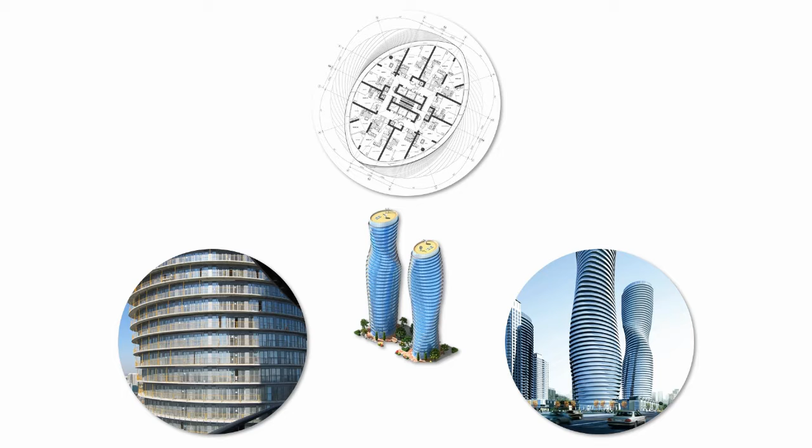Let's begin our main contents with a short video. I remember one day we got an email, but when I opened it, I saw congratulations.

Mississauga has ambition to build a future. So I think the question is, what does the future city look like? In the high-density urban context, we should introduce nature.

I was quite sure our tower shouldn't be another memorial or symbol of strength or power. We should introduce this beautiful curve, the softness. The opportunity was rare, not only for me, but also for a city like Mississauga.

Yansong Ma is both founder and chief architect of MAD Studio. He designs naturalistic architectures to create harmony between the environment and architecture.

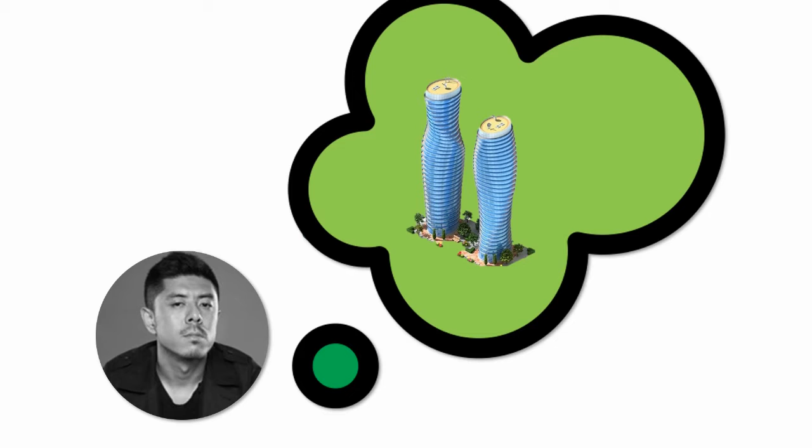After much thinking, Yansong Ma designed the Absolute World Tower. Its design reflects Yansong Ma's design spirit. The building contains three characteristics opposite to common skyscrapers: naturalism, delicacy, and humanity.

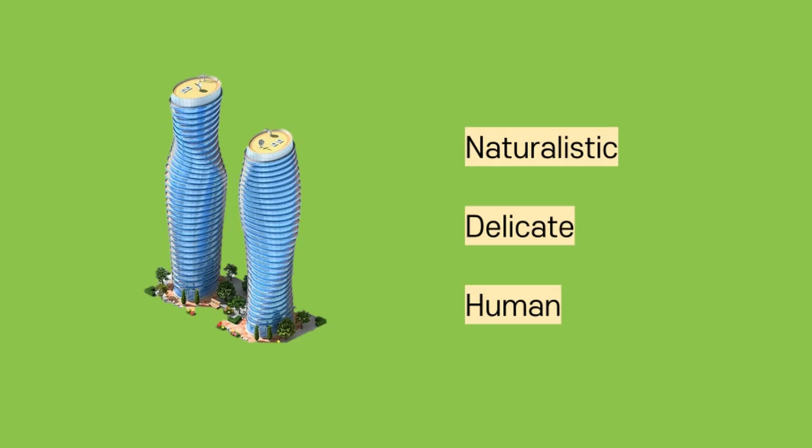Absolute Tower has three major design properties: rotating slab, cantilever structure of balcony, and high-rise building. Let's deal with the challenges arising from these properties.

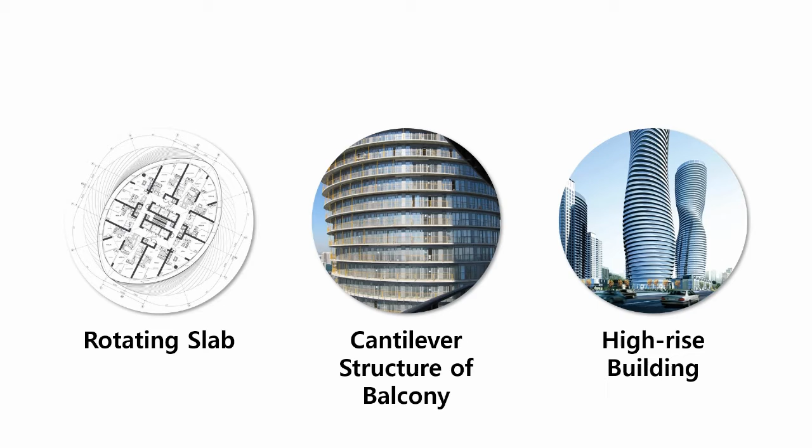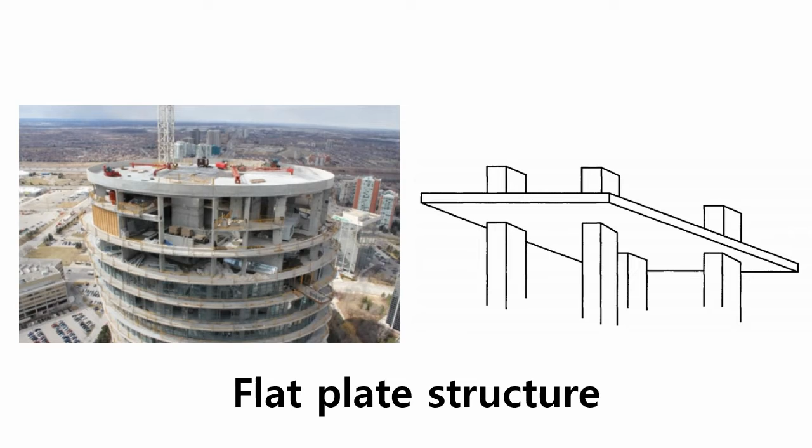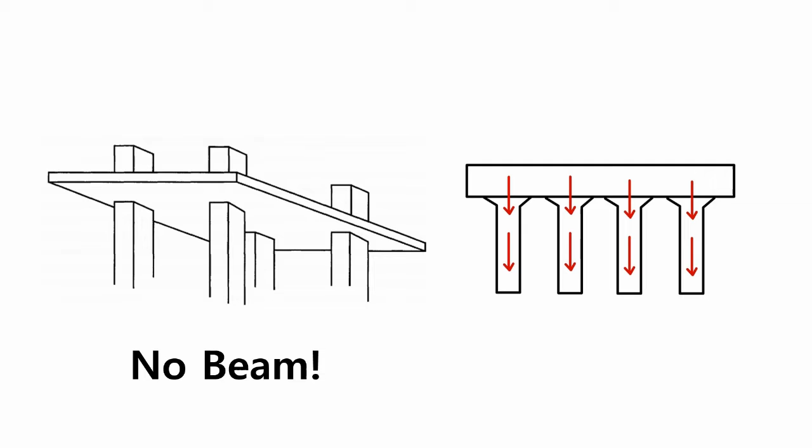The most conspicuous characteristic of the Absolute World Tower is a rotating slab. Also, an important feature is that it has a flat plate structure. This is a type of architectural structure consisting of columns and slabs without beams, which are horizontal structural members connected to vertical columns and supporting loads.

The two major features, the rotating slab and the flat plate structure, cause two problems. The first problem is structural instability. This can be figured out by three methods.

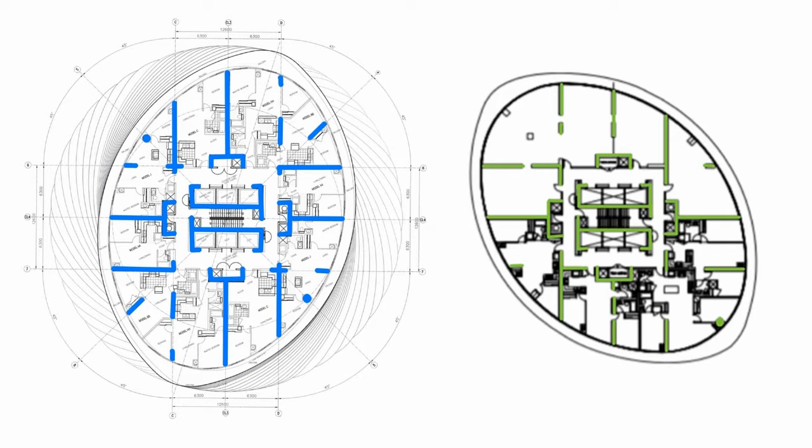Let's begin with the load-bearing wall. These are two different floors of the Absolute World Towers respectively. Although the rotation degree between the two slabs is very different, the load-bearing wall is located at the same position on each floor. Also, the load-bearing walls extend or contract according to the slab.

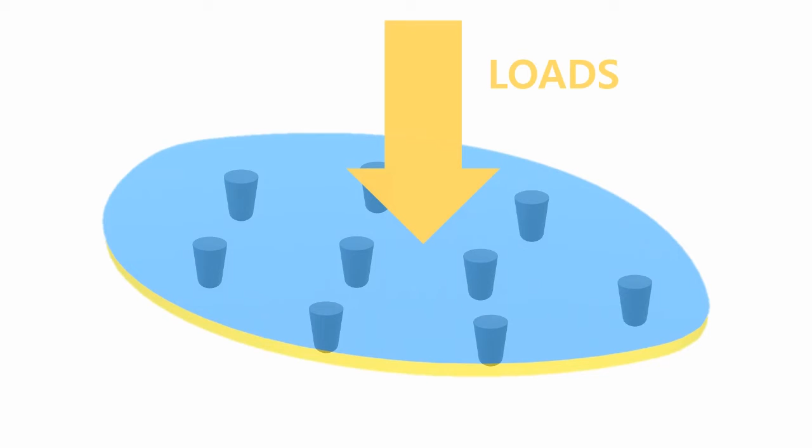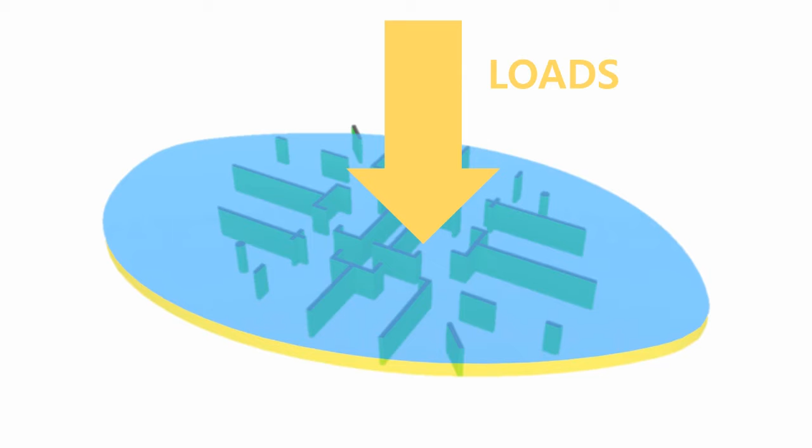Different from the column structure, the load-bearing wall supports each slab with sustained accurate consistency. Therefore, the load-bearing wall contributes to supplementing the structural instability of the Absolute World Towers.

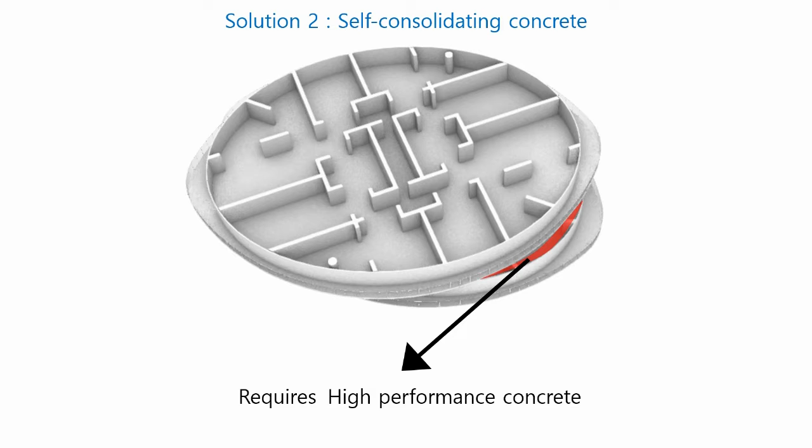The second method is the use of self-consolidating concrete. The rotating slab of the Absolute World Towers requires high-performance concrete. To operate as high-performance concrete, high strength, high flow, and high durability are needed.

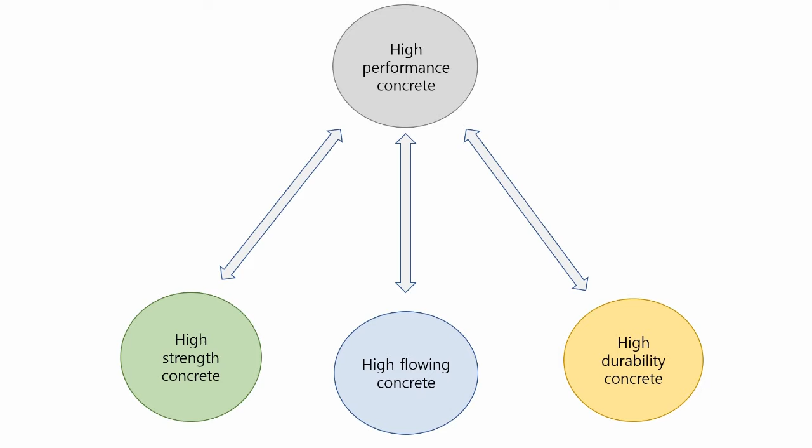Generally, when the concrete strength increases, the concrete flowability decreases according to the increase of concrete strength. However, in the case of self-consolidating concrete, it can raise the flowability of the concrete while maintaining sufficient strength to withstand the vertical load.

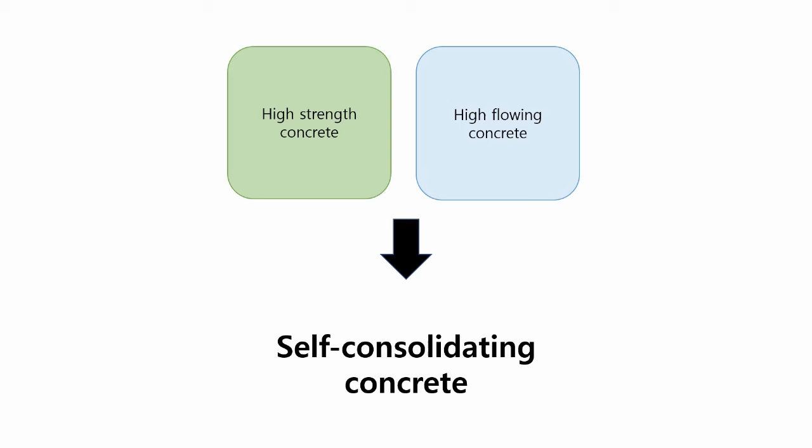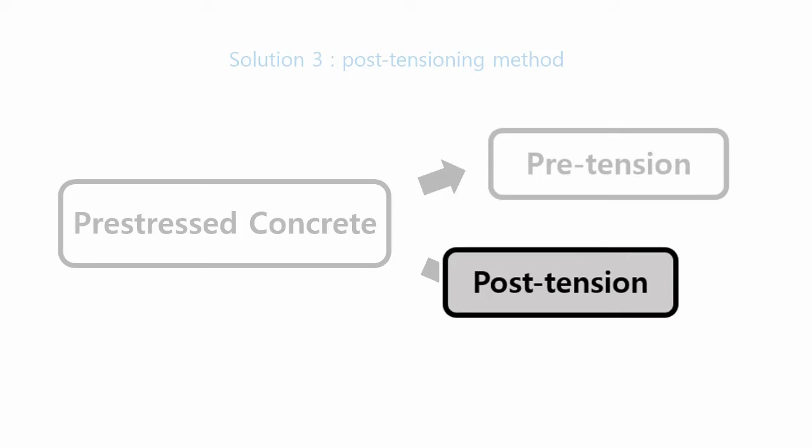The last method used to solve the problem is the post-tensioning method. In the case of pre-stressed concrete, pre-tensioning and post-tensioning methods can be used. Among these two methods, Absolute World Towers use the post-tensioning method.

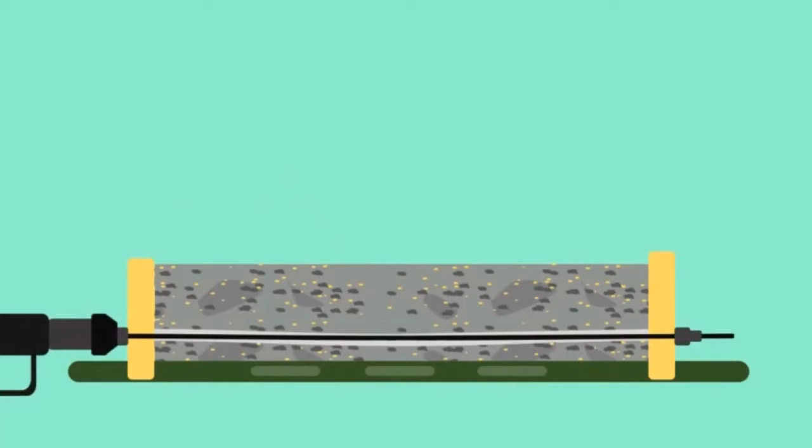In the post-tensioning method, the sheath tube with the strand is placed in the formwork before concrete pouring and hardening. By applying tension, we add stress to the concrete. Therefore, using the post-tensioning method, we can conclude that the intensity of the concrete increases.

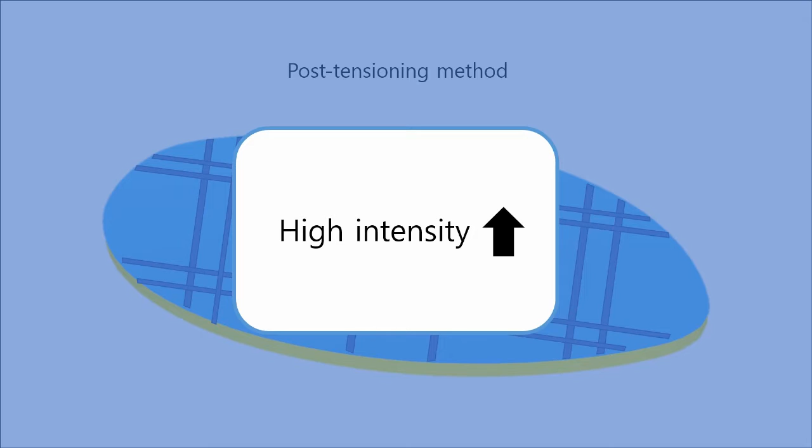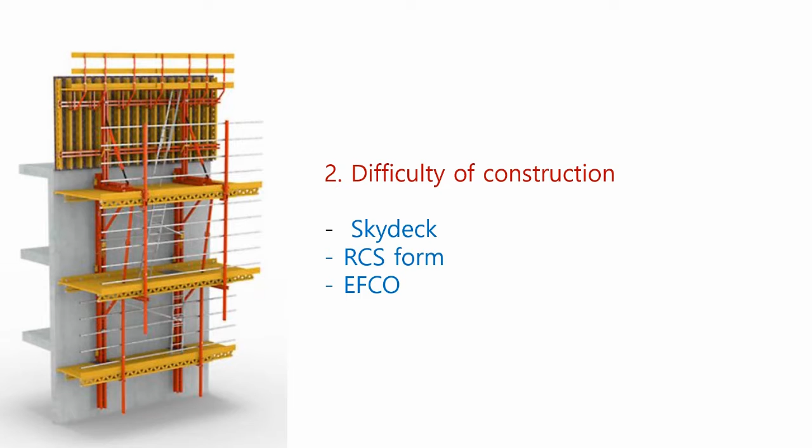Among the two problems, the second is the difficulty of construction. This problem takes place because of two conspicuous features of the Absolute World Towers: the elliptic slab and the rotating slab.

The difficulty of construction caused by the elliptic slab is solved through skydeck, and that of the rotating slab is figured out by RCS form. Let's begin with the skydeck.

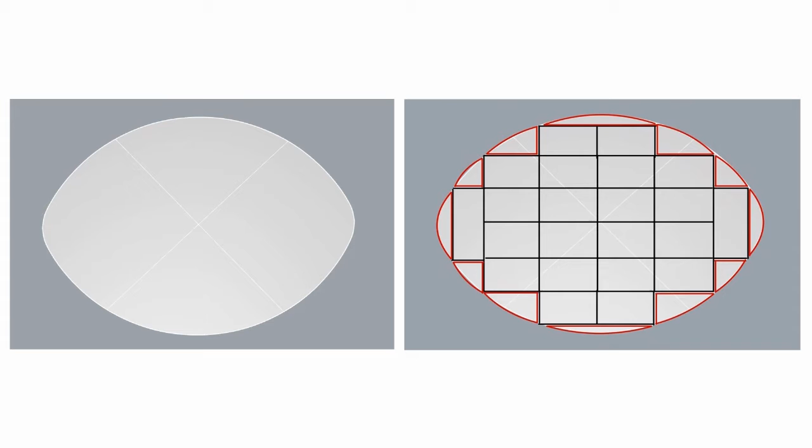The picture on the left side is the elliptical slab of the Absolute World Towers. Due to the elliptical shape, the panel cannot be cut in an identical shape. Engineers assembled standardized rectangular panels and filled the rest with specially produced panels to match the shape.

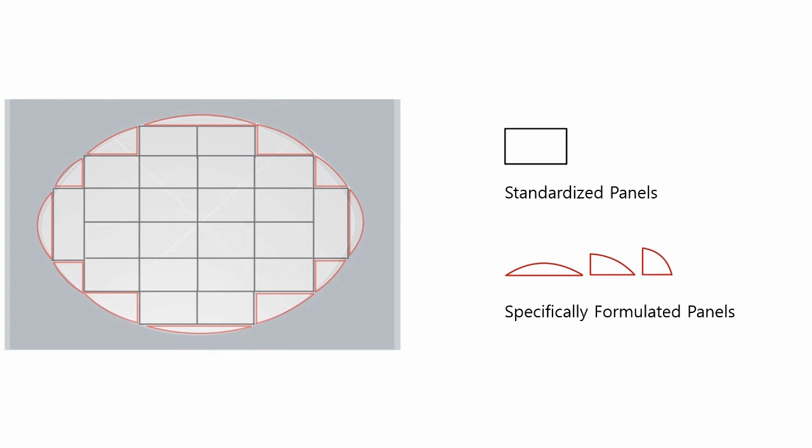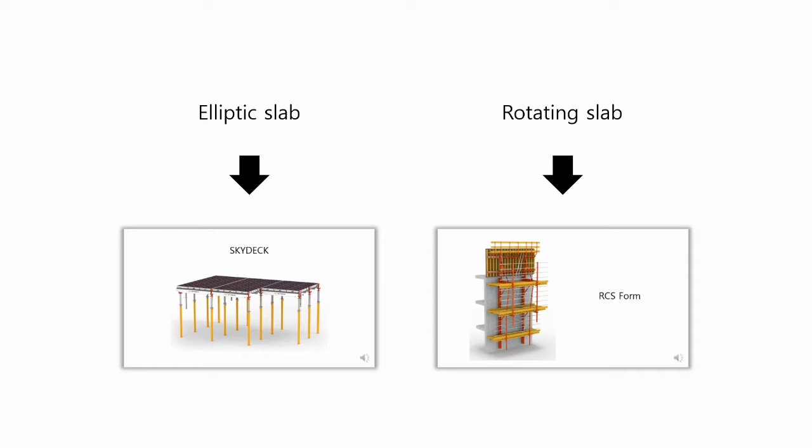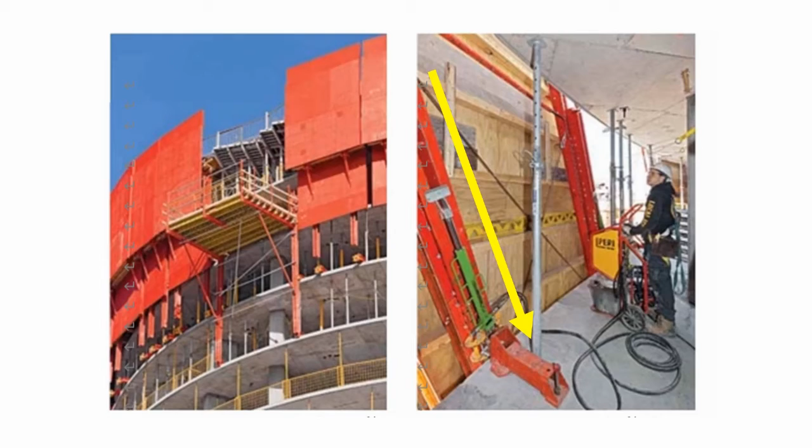The difficulty of construction caused by the rotating slab is figured out by the RCS form. RCS form is the rail climbing system. The most important reason RCS form is used is that it can be stacked exactly at the right angle.

Therefore, the Absolute World Tower, with different angles of slabs rotating on each layer, was also able to implement the correct angle using RCS form.

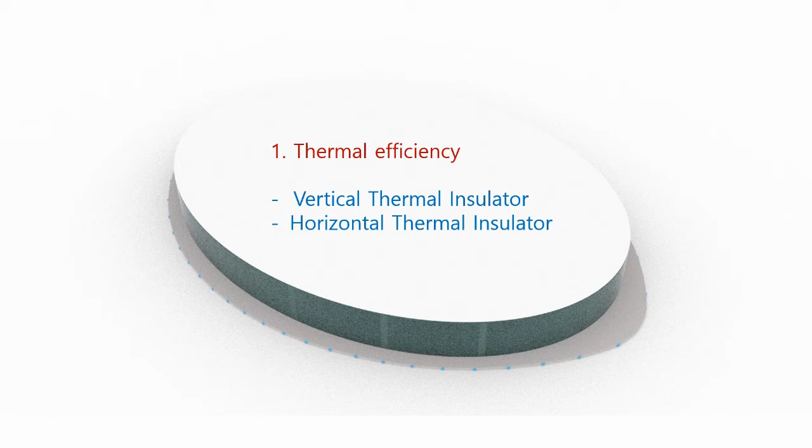The figure represents one floor of the Absolute Tower. The Absolute Tower has a structure in which the balcony wraps around the entire building. There are horizontal and vertical flows of heat.

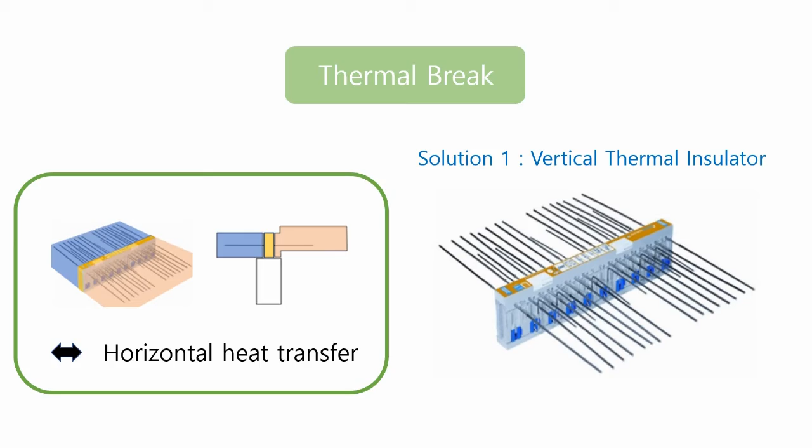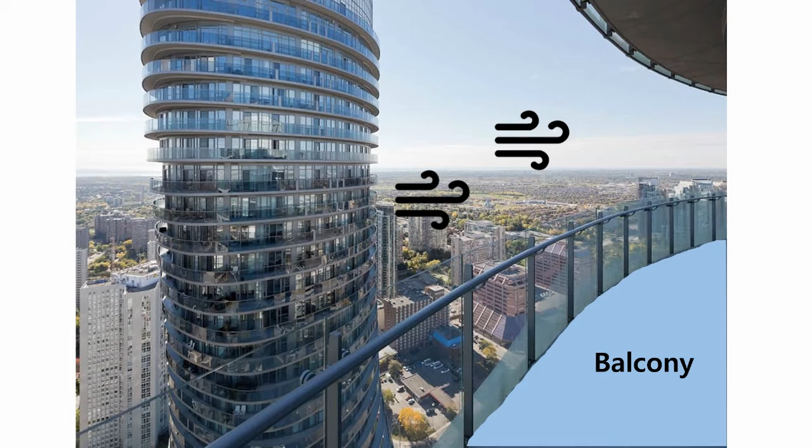How does the thermal break specifically control the flow of horizontal heat? In the case of the Absolute World Towers, the balcony encloses the whole floor, so the balcony is exposed to the outdoors. Thus, the balcony is directly affected by the climate.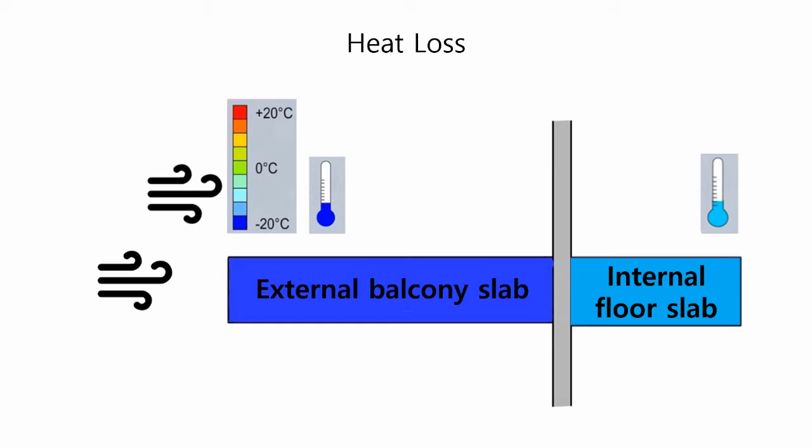If the temperature of an external balcony slab decreases due to the outside temperature decrease, the internal floor slab also decreases, resulting in heat loss. It is a thermal break that can deal with these problems.

A thermal break is a structure in which a reinforcement that connects the external balcony slab and the internal floor slab crosses the thermal insulation in the middle.

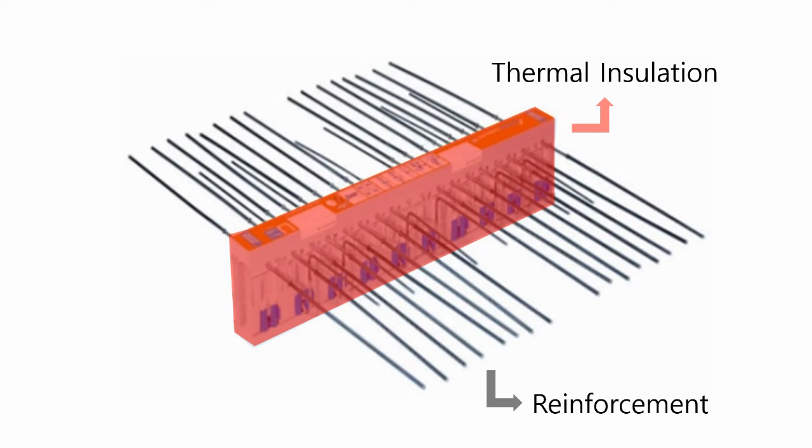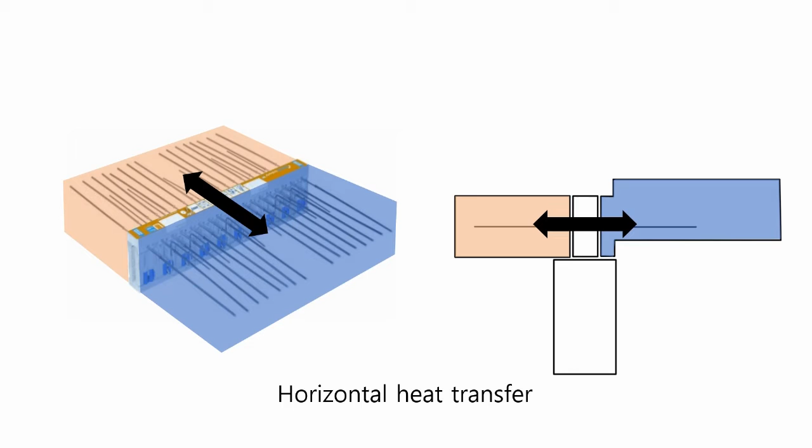There is an external balcony slab and also an internal floor slab. Between the external balcony slab and the internal floor slab, horizontal heat transfer occurs. The method that prevents horizontal heat transfer is the thermal break.

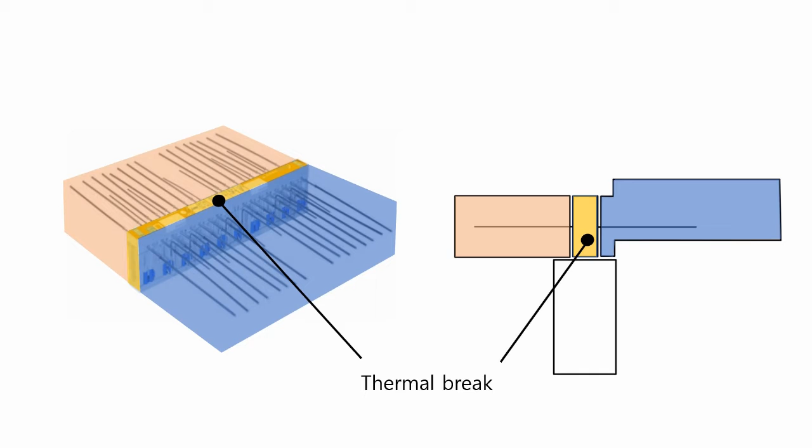We can notice that the horizontal flow of heat can be adjusted by the thermal break.

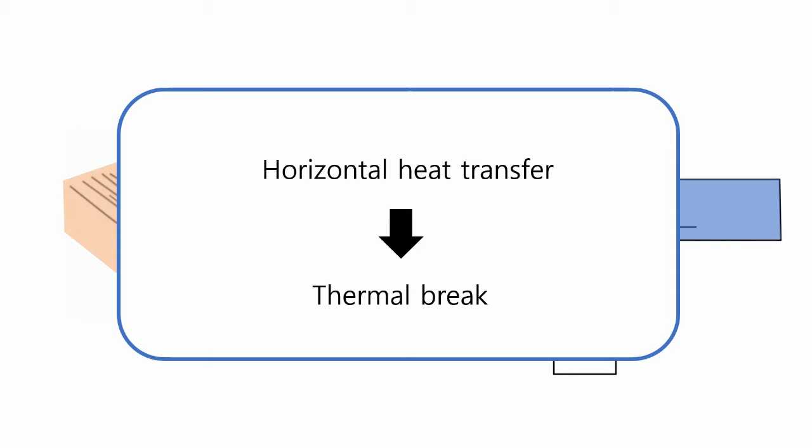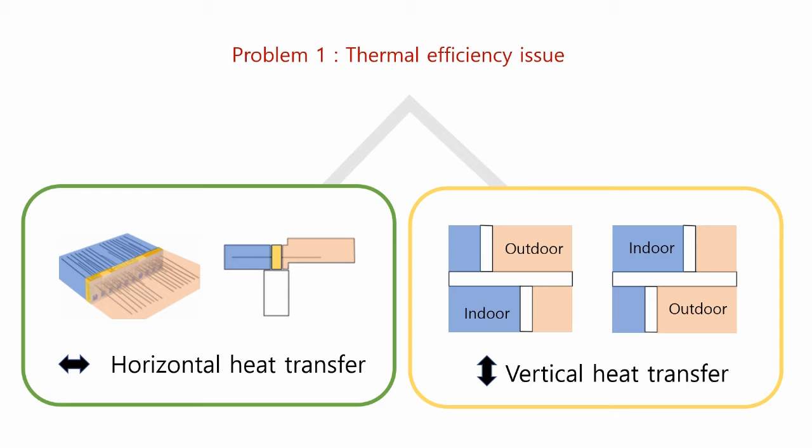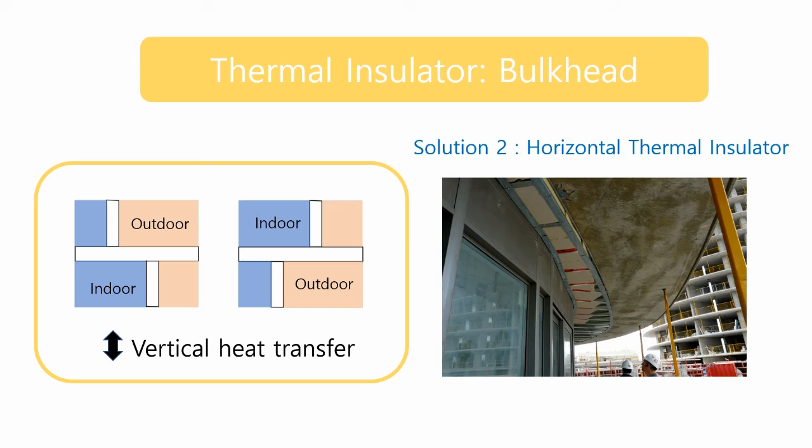Let's move on to the solution of vertical heat transfer, bulkhead, the thermal insulator. Bulkhead is used to prevent vertical heat transfer. In the case of protruded balconies, vertical heat transfer occurs between the upper and lower floors.

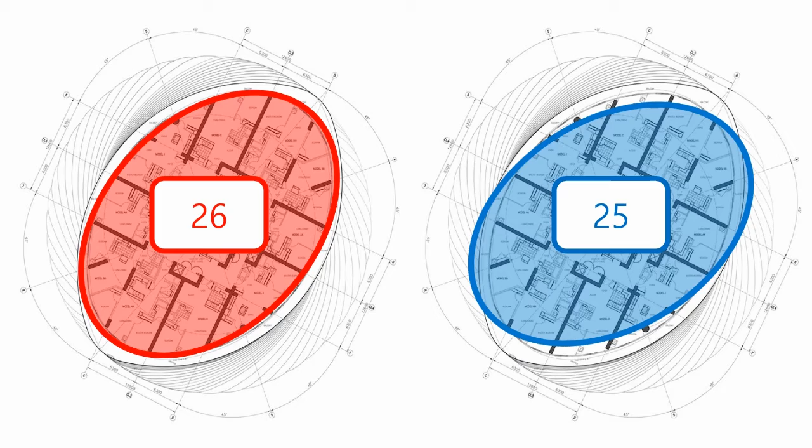There are 25 and 26 floors. The 26th floor rotates 8 degrees from the 25th floor, the maximum rotation of this building. There is a non-overlapping space between the two floors, directly connected to the outside and inside, requiring a thermal insulator to prevent heat transfer - that is the bulkhead.

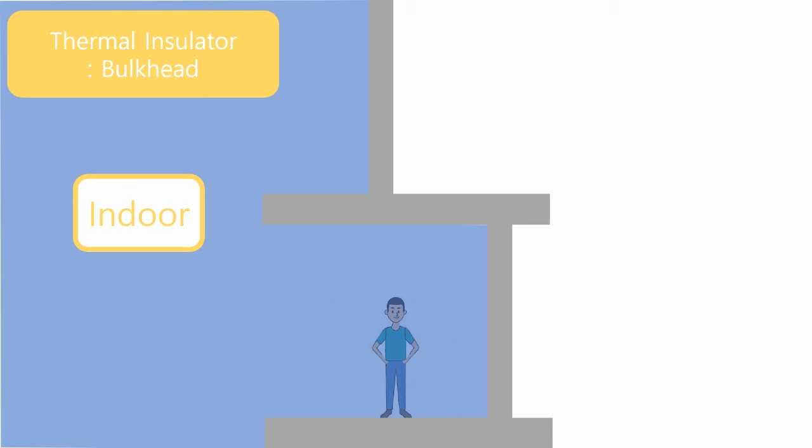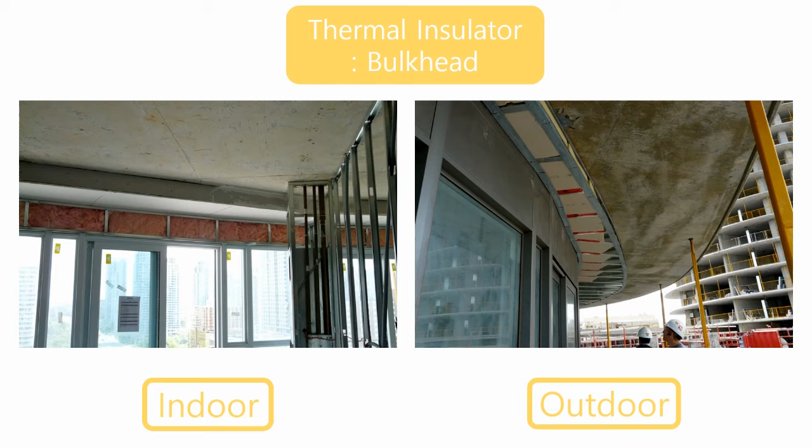When the lower floor protrudes more than the upper floor, outside air flows vertically into the inside. We need a thermal insulator to prevent heat from entering the interior. In this situation, the lower floor is exposed to the outside. The insulator is attached to the ceiling inside and outside. Overall, you can find that the insulator is attached to each layer.

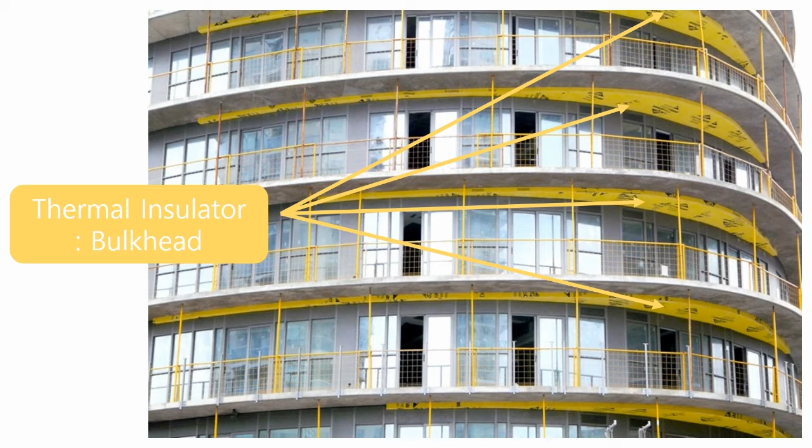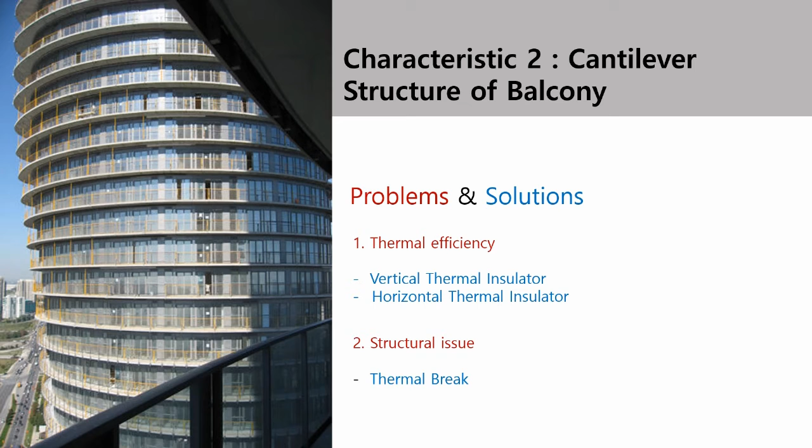Now let's look at the structural issues of the cantilever structure. A thermal break is needed to hold the structure. When comparing a simple beam and cantilever structure under the same load, 4 times as much moment affects the cantilever structure. Therefore, more reinforcement is needed.

The thermal break is not only one of the ways to improve thermal efficiency, but it also serves as additional load reinforcement in the cantilever structure, which needs more reinforcement.

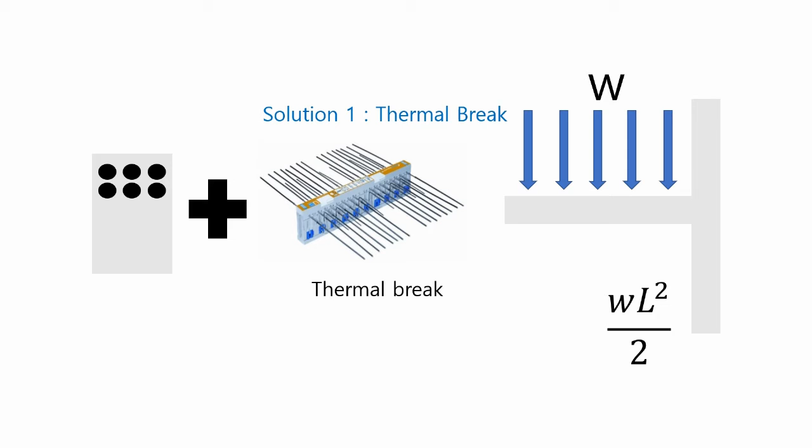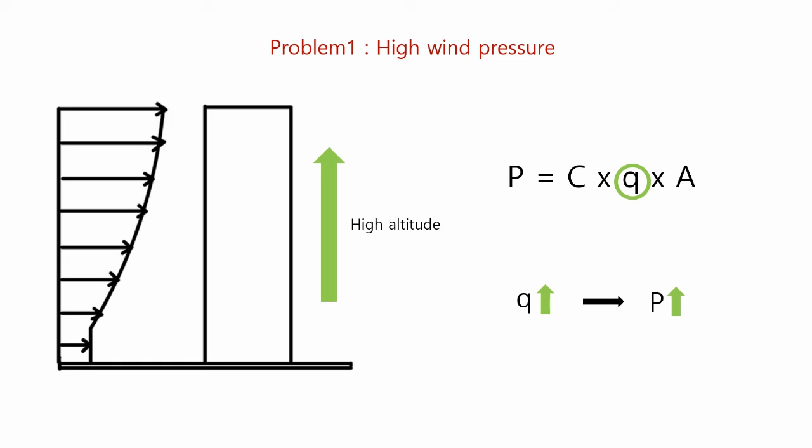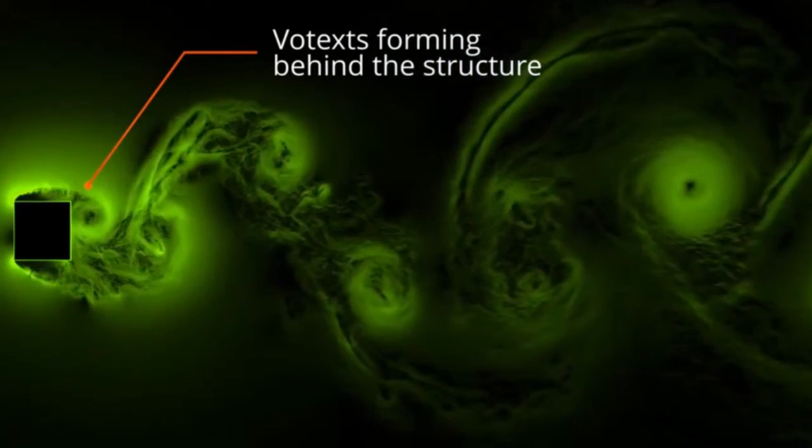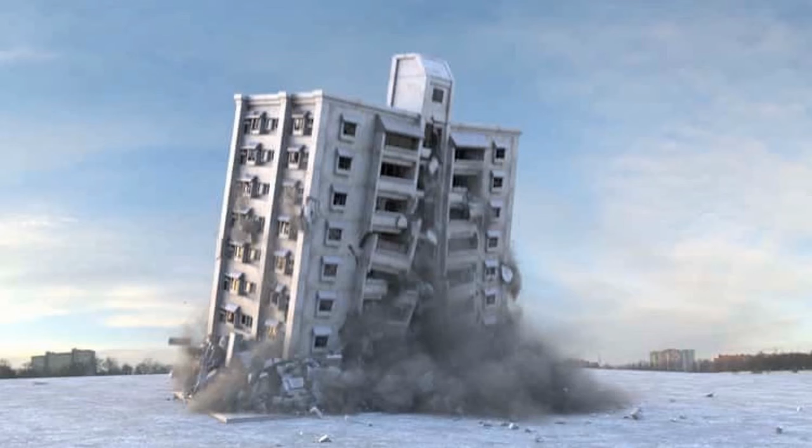To determine the effects of wind load, we need to know the mechanism through which the wind passes. As the wind passes through the building, a vortex flow is created. This vortex flow pushes the building from side to side. Therefore, wind loads are more likely to cause resonance and cause the collapse of skyscrapers.

The first way to solve this problem was to use a shear wall. Shear reinforcement was added to the load-bearing wall so that it could be used as a shear wall at the same time.

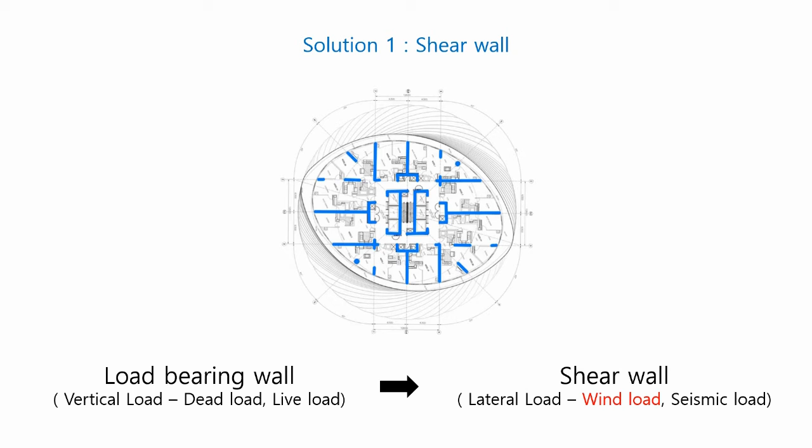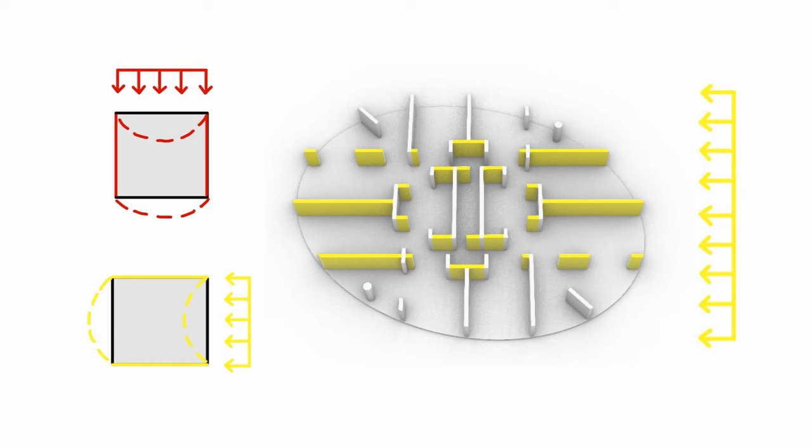When I apply the above-mentioned method of resisting wind load to our building, the red walls operate as shear walls resisting wind load in the red direction, and the yellow walls operate as shear walls resisting wind load in the yellow direction. The overall operation looks like this.

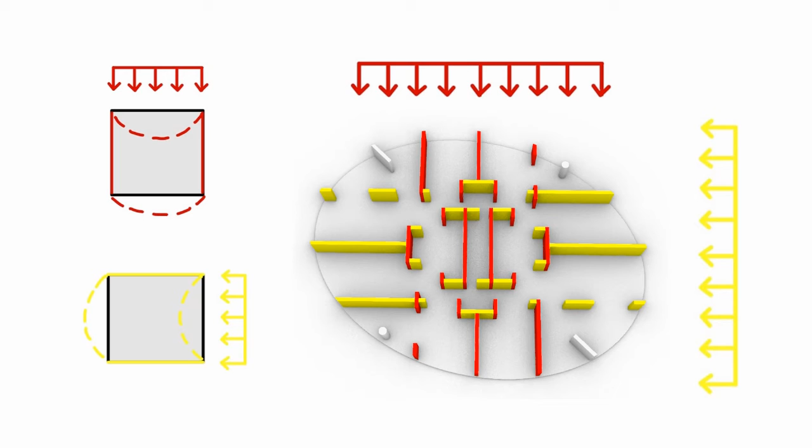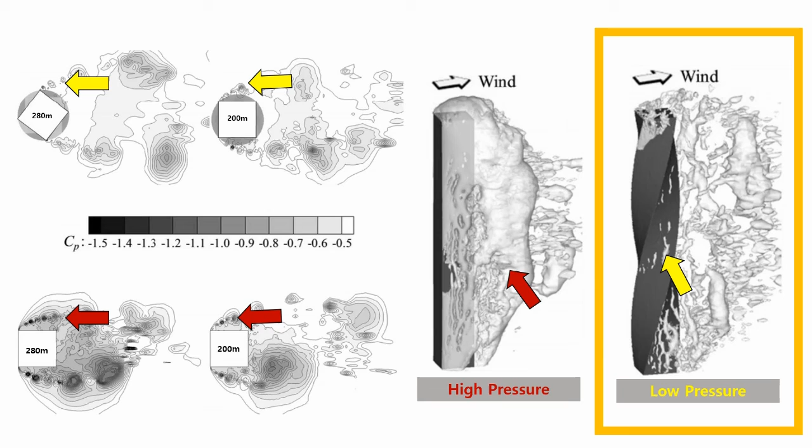A second solution is to twist the building to distribute the wind load. When the building is twisted, it can be seen that the wind pressure is relatively low compared to other buildings. Twisted design is effective for dispersing wind loads.

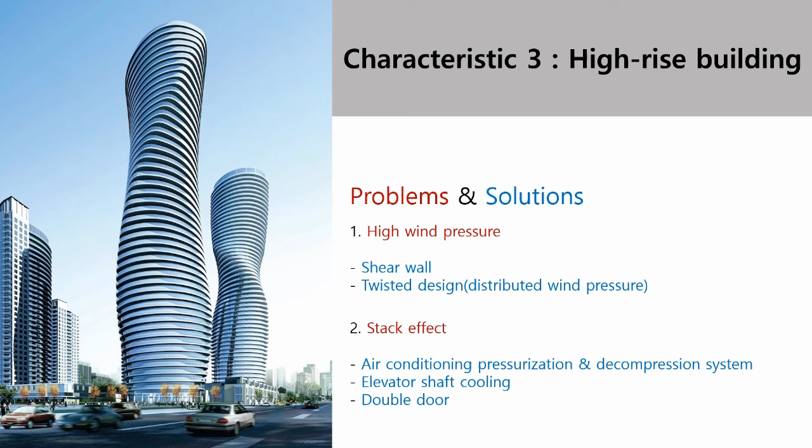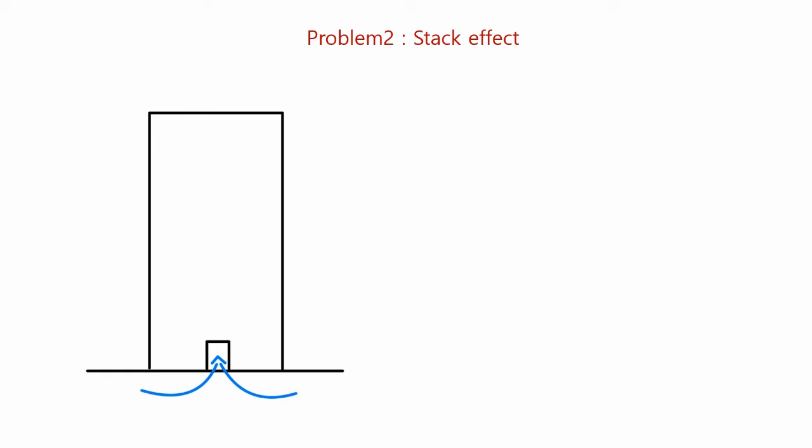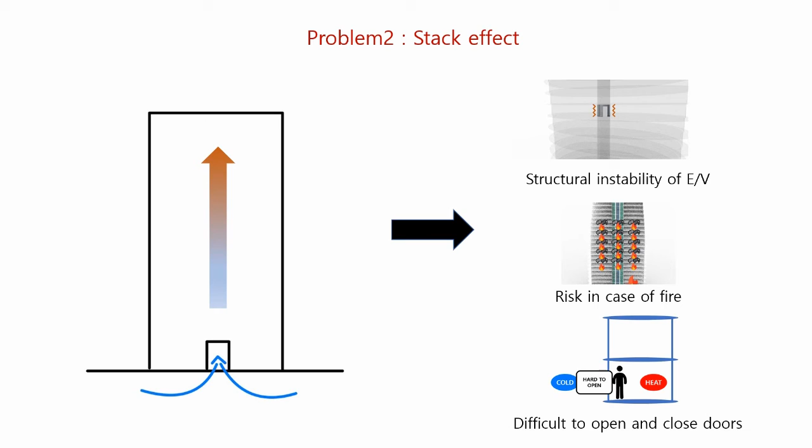The second problem caused by high-rise buildings is the stack effect. The stack effect is that when cold air suddenly blows into the lower part of the building in winter, warm air inside rises rapidly along the core of the building, negatively affecting structural stability. The stack effect causes three problems: structural instability of the elevator, risk in case of fire, and difficulty opening and closing doors.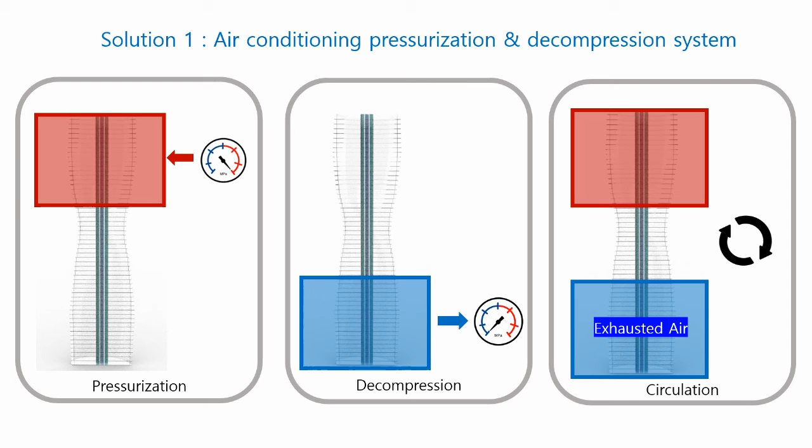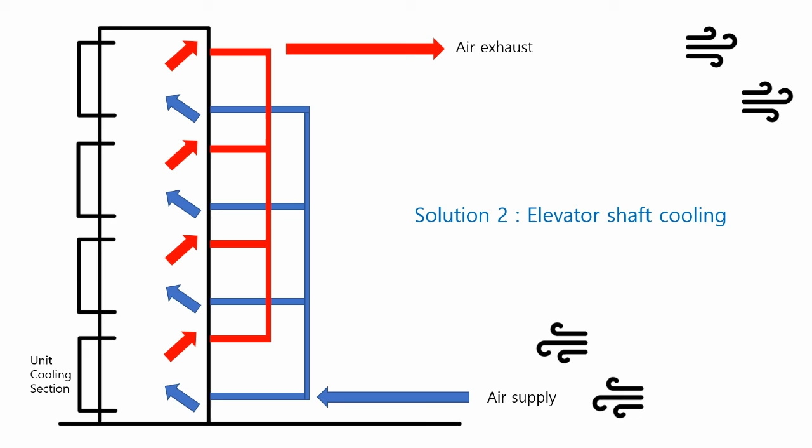The first method to solve this problem is the air conditioning pressurization and decompression system. The main characteristic of this method is that air is supplied and exhausted per unit cooling section. Because of this unit section, the pressure difference is decreased and so the stack effect is reduced. If elevator shaft cooling is added to the general elevator shaft, the shaft is cooled and consequently the stack effect is decreased.

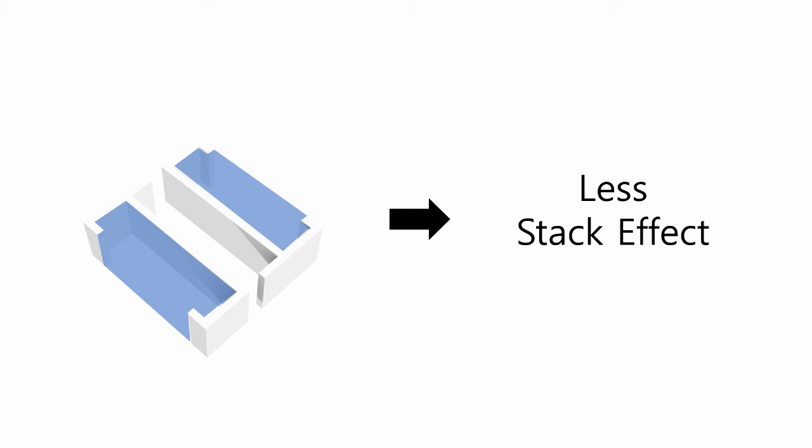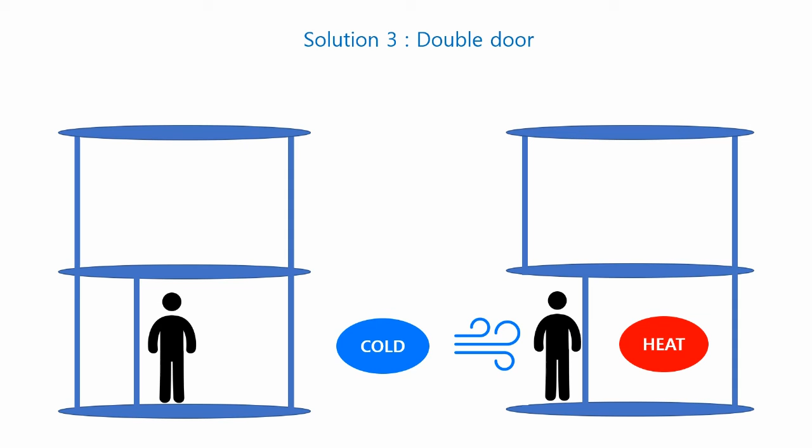A third solution is to place a double door. Placing a double door can reduce the occurrence of the stack effect since it is relatively easy to open and does not allow rapid cold air inflow.

Although many problems were solved with the various methods reviewed previously, there were some that did not solve the problems. There are three things that were not solved from our project.

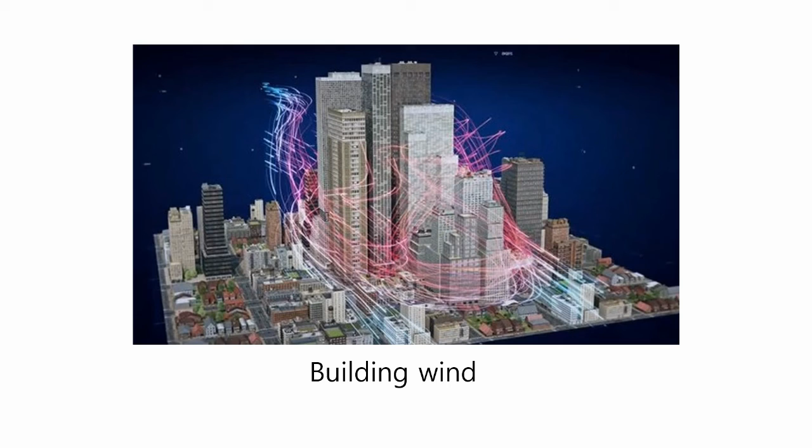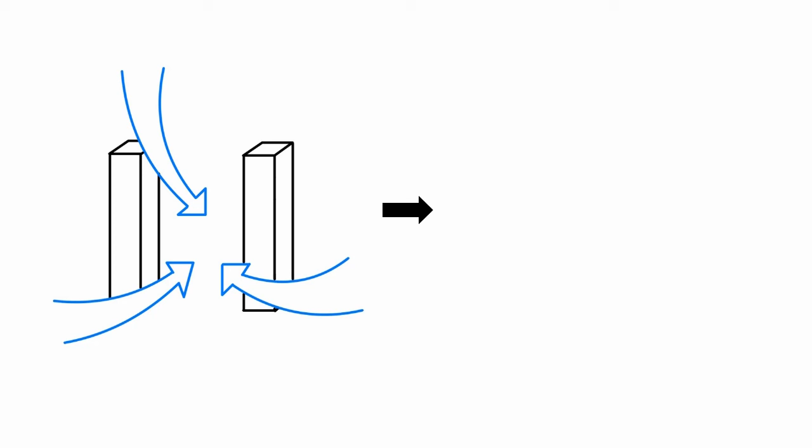First is a phenomenon mentioned as a problem with high-rise buildings. The building wind phenomenon is a phenomenon in which, when wind blows between skyscrapers, it suddenly passes through a narrow passage and the pressure is momentarily lower and the speed increases, and the wind rotates at the back of the building.

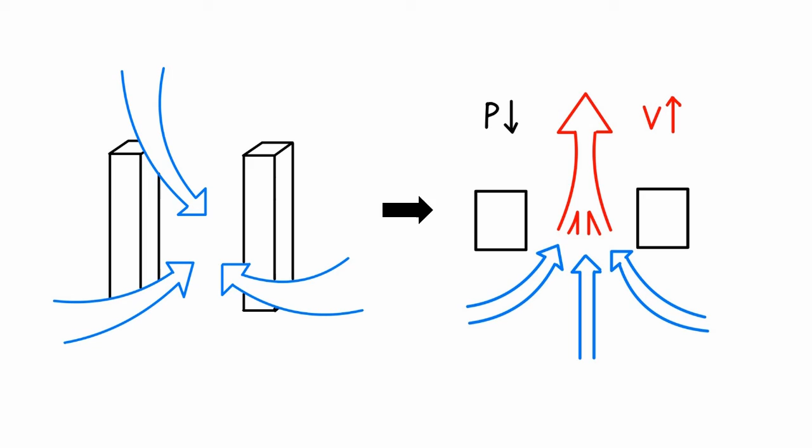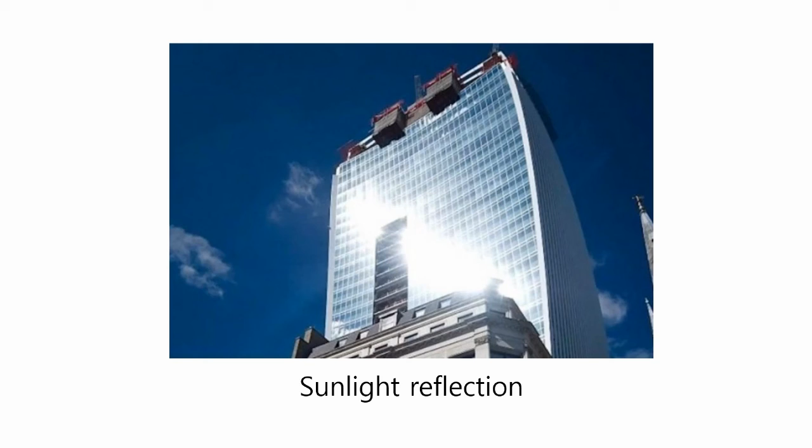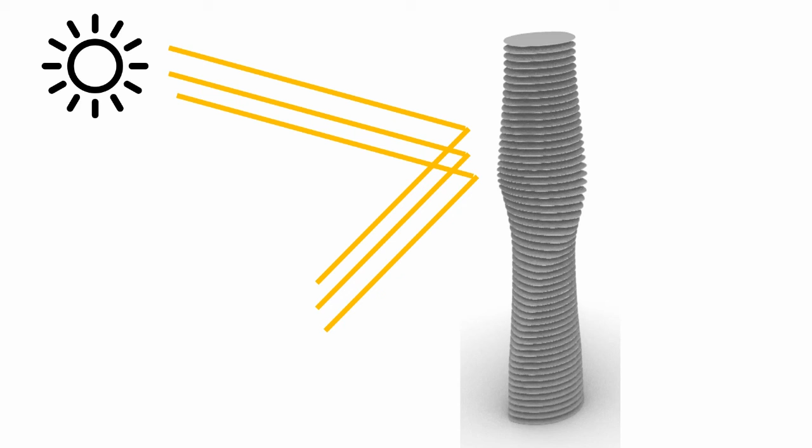The second thing is light reflection phenomenon, which is emerging as a problem with the curtain wall method. Although the exterior of the Absolute Tower is not closed with the curtain wall method, the glass on the balconies surrounding the front of the building reflects a lot of light. The problem with light reflection is that it reflects light directly on people or objects on the ground. It may disturb eyesight, and an accident can occur.

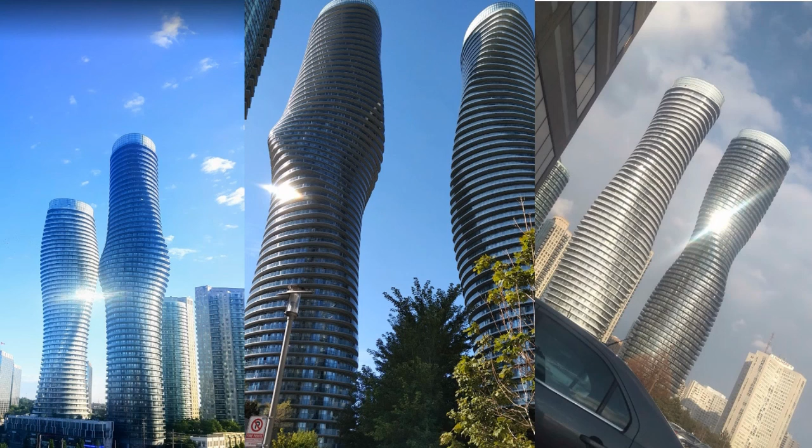So in general, film is used to solve light reflection. It works on the principle of reducing light reflection by attaching a film to the window. In the case of the Absolute Tower, light reflection was very high, and it may not have a counter-plan.

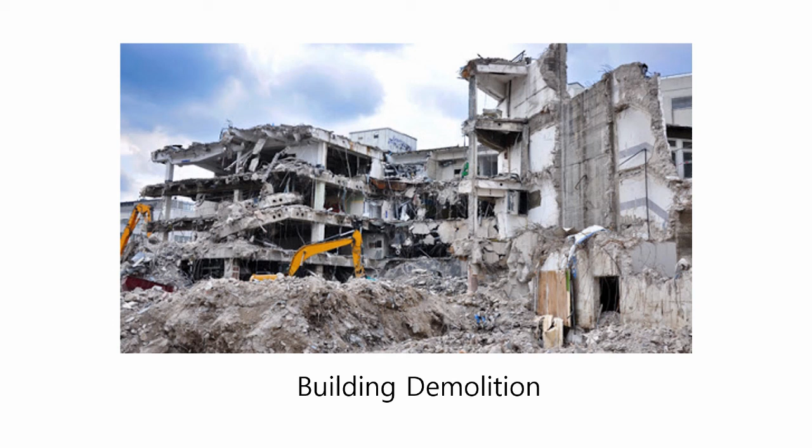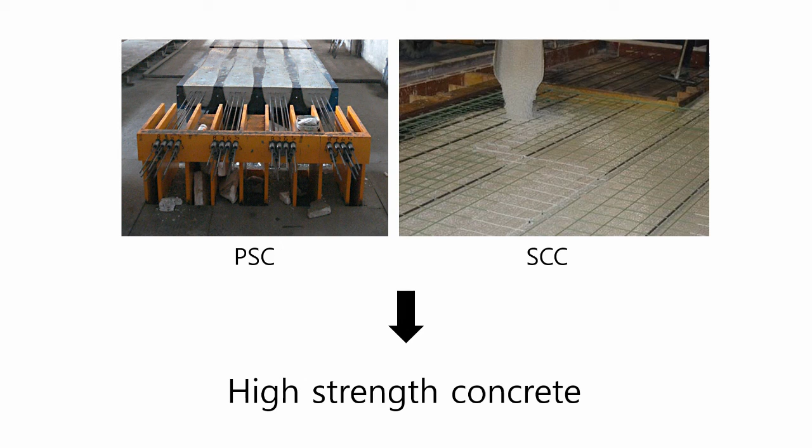The last thing is the building demolition problem. The Absolute Tower uses high-strength concrete such as PSC or SCC for a stable structure. Although it can develop high strength, there was a problem that it was very difficult to demolish the building later.